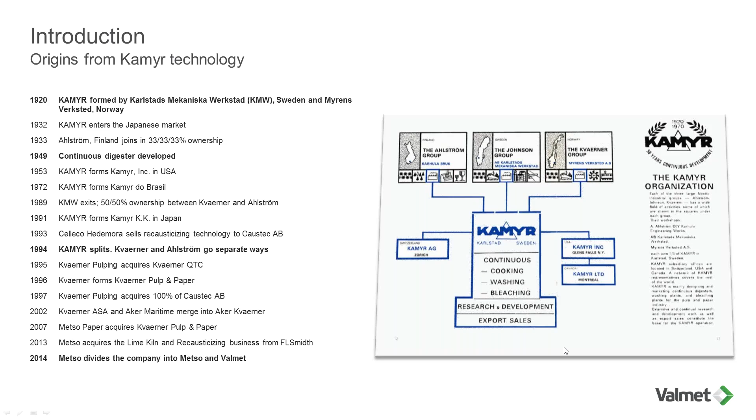So Valmet has been present in the continuous digester technology since the beginning, with many startups around the world. The development continues today through the Valmet continuous cooking technologies that we offer with the new digester systems. And over the years, Valmet has worked to apply these newer technologies offered with the new systems back to the older conventional systems that most of us here in North America are familiar with.

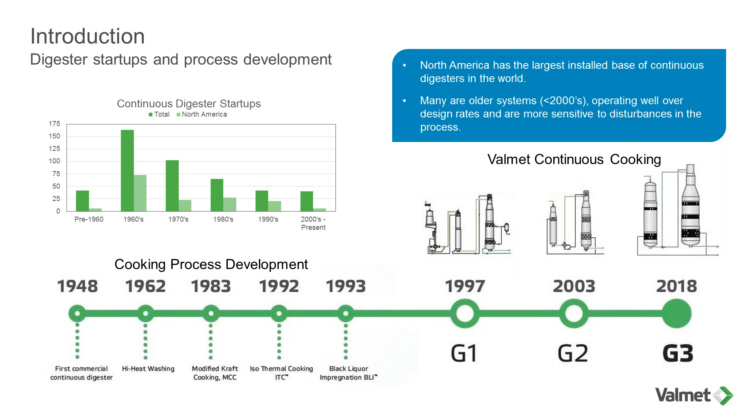North America has the largest installed base of continuous digesters in the world. And many of these are older systems that have been running for many years, operating well over the design rates. And as a result, they're more sensitive to disturbances in the process. So for those that have worked with a continuous digester system, we all know that there are many common issues found with overloaded systems. And what you see on the screen here are just a few.

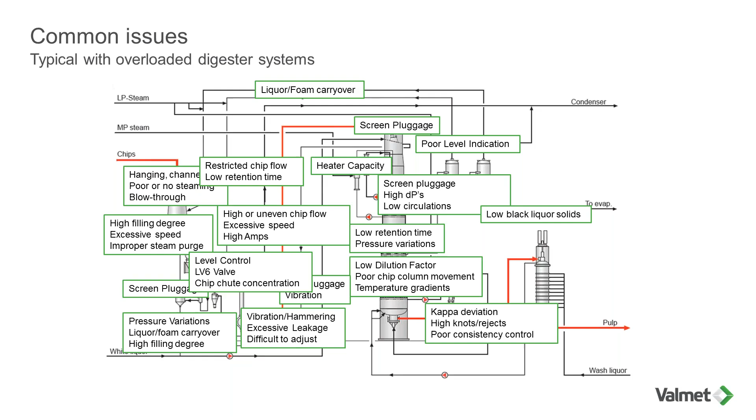We see issues from the chip bin through the feed system, the digester vessel, flash system, basically across the entire digester system. And since each system is different, they have many unique issues that require a thorough investigation. So from these common issues, we also get common questions from our customers. The first being, we have a problem with blank. What does Valmet have to help with that issue? And also, the customers want to run more production. What is the maximum production that we can achieve from the digester, and what is needed to get there?

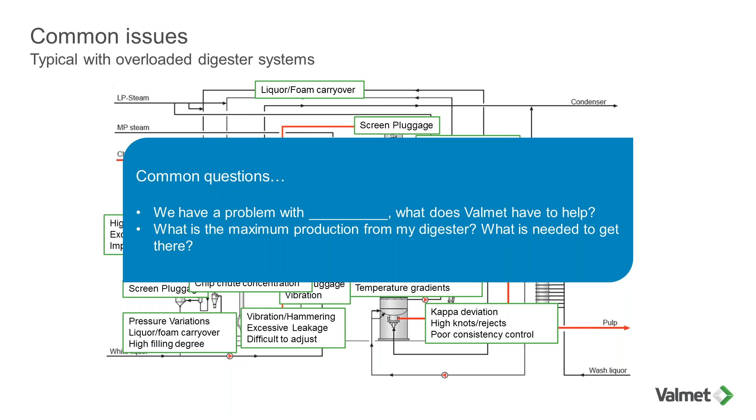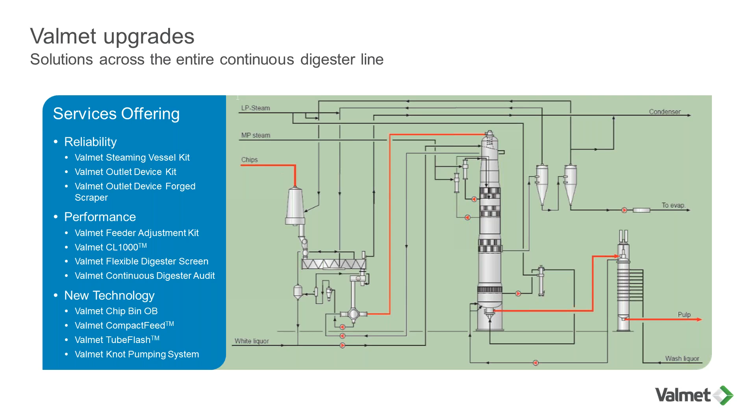So when you look at what Valmet can offer, we have solutions across the entire continuous digester line, from the chip bin all the way through the vessel to the blow line. These upgrades can improve reliability and runnability, and several are shown here on the screen. So with years of experience in the continuous digester, Valmet can offer that OEM product knowledge along with new technologies for the system. And today, we're going to be reviewing the Valmet continuous digester audit. That's the approach Valmet likes to take in reviewing an overloaded digester system.

So the Valmet Continuous Digester Audit is a process audit that's tailored to meet the needs of the mill. So we focus on whatever that specific need is, whether it's a planned production increase, quality improvements, or just the overall reliability and availability improvement of the system. And the intent of the audit is to address the system issues, not just the individual components, but since all of those issues are often interrelated, it's a holistic approach to evaluate the entire system. We begin by looking at the existing equipment, at the current conditions, and see how those compare to design.

This allows us to identify causes of the system disturbances or bottlenecks in the process. And on the next few slides, I'll show examples of some key design calculations and evaluations that we use, as well as some considerations around the digester vessel design. Following that evaluation, we're able to provide recommendations to improve the current conditions and system performance, as well as any considerations for future operation with increased production or things like that.

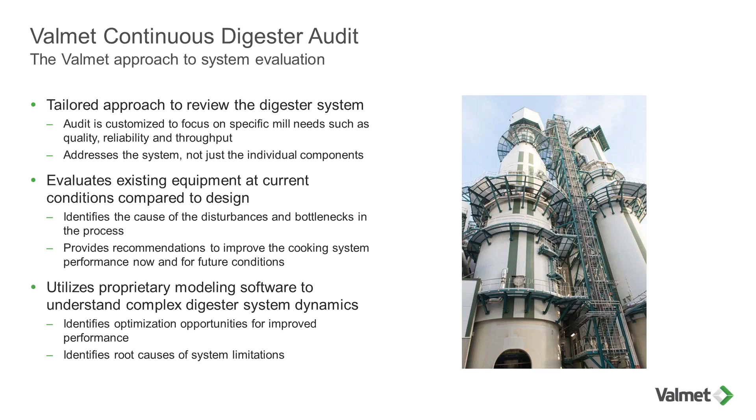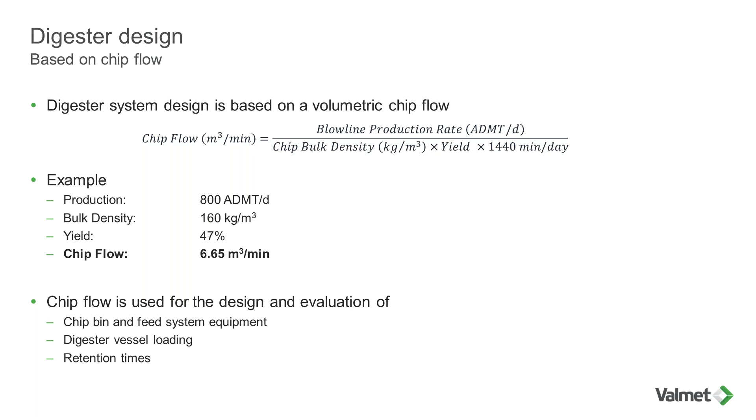One of the first things that we look at when it comes to digester design, one of the fundamentals, is the chip flow. Chip flow is calculated based on the target production, the chip bulk density, and the overall digester yield. The chip bulk density and the yield are often the more difficult parameters to understand, but they are definitely key pieces of information in order to arrive at the correct chip flow. And these are typically established from laboratory tests or cooking trials in the case of a new digester system, or often the mill have performed those tests on their own, and so they have that data.

Chip flow itself is really the single most important parameter when we evaluate the digester system. We use it to evaluate the sizing of the feed system equipment. An example would be for a low pressure feeder for a given chip flow and a given size of feeder. Does it have the proper capacity? Is it operating at the correct filling degree? If not, can the speed be increased to get to the appropriate filling degree, or do we need to get a larger size feeder? That's the type of evaluation that we do for all of the digester equipment from the feed line through the digester. And then also we use that chip flow to evaluate the loading of the digester vessel and the retention times, and we'll get more into that in the next few slides.

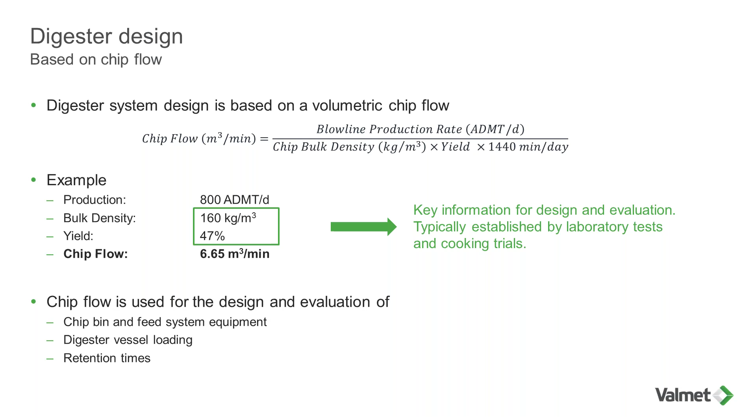When we look at the maximum production from the digester, we often discuss the digester specific load, or the chip load from the digester. What specific load is by definition is the chip flow divided by the cross-sectional area of the digester vessel taken at the extraction screens. Through experience over time, we've seen that digester operations can be compromised whenever that chip load is well above design. So most digesters were built for around 15 cubic meters per square meter hour of chip load. I know that's a strange unit, but basically it derives a velocity of the chip column through the vessel.

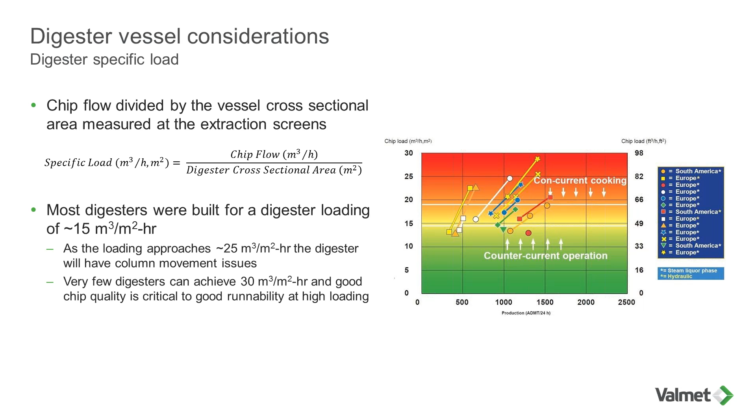So in the graph, you can see typically at design, the digesters were at the 15 specific load, and they operated with a countercurrent upflow in the digester. But as that loading increases, what the mills are forced to do is transition to a concurrent type cooking process or a downflow cooking process because of the excessive loading in the vessel. It's also important to know that this is one of the most difficult ones to overcome for folks that are looking to increase production. When the chip load is high, there aren't really any avenues to address the high chip load because there is simply a constraint of the overall digester vessel size.

And as the chip column is formed, as the cooking is happening through the digester vessel, that packing degree will increase as the chip moves through the digester. So at the bottom of the digester, a typical packing degree will be in the 1.7 to 1.9 range. And again, what that's telling you is you're able to increase the amount of chips in a given volume. So there's less void space around the chips in the bottom of the digester.

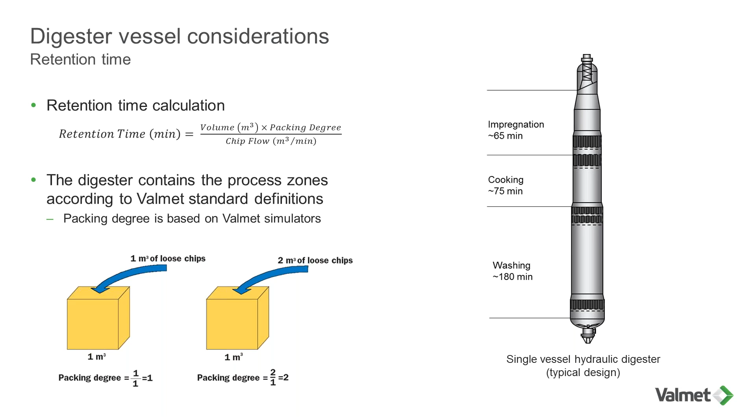And what we do through the audit is really look at what those retention times are and provide some recommendations of what can be done, whether it be modifications to the digester vessel to change the process zones, extending the impregnation zone, cooking zone. Those are typical retrofits that can be done for the digester. So a good understanding of what the retention time is, is key to that evaluation.

The third thing that we look at when it comes to the digester vessel and capacity involves the loading of the screens in the digester. In almost all cases, the flow resistance is in the chip column itself and not in the screen. So for a hydraulic digester that has cooking circulations or for an extraction zone in the digester, you're trying to pull the liquor through the chip column and through the screens to exit from the vessel. So in nearly any case, that resistance is in the chip column.

And so what that means is that you need adequate time for the liquor to pass from the center of the chip column through the chip bed to the digester wall. And that time really equates to overall screen zone height. A typical design based on, again, many years of experience with continuous digesters is around 15 air-dried metric tons a day per square meter of screen area.

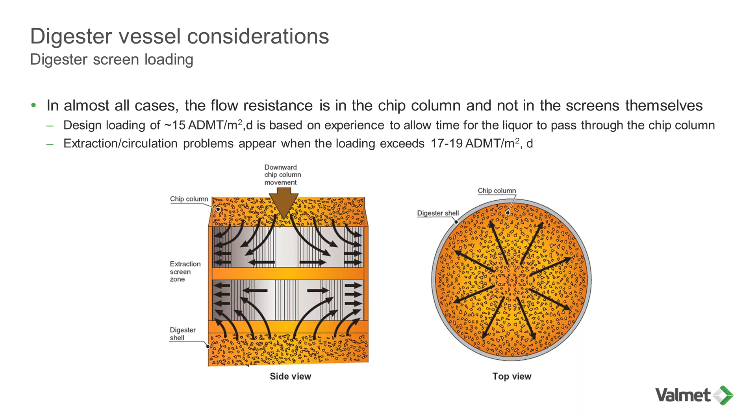And what we see is that as that loading increases in the 17 to 19 or even in the low 20 range, that's where folks start seeing issues with limited extraction, plugged screens, and circulation issues. So reducing the screen loading is something that can often be done with additional screen height. And that's something that we review in the audit to see what the best approach is in order to achieve a reduced loading.

The next thing that we look at in the audit, we use the Valmet simulators to really review the digester operation itself. So we have two simulators to do this, and one is Valmet Packsim, and that's used to evaluate the chip column compaction and the overall driving force, the forces that are moving the chip column through the digester.

And what Packsim does is it's a model that divides the digester from top to bottom in several cross-sectional segments. And so a balance is done across those segments in order to develop that evaluation, the total picture of the digester. So we simulate the runnability of the digester by modeling that interaction with the liquor flows, temperature, chemical concentrations, and kappa.

Crossim is the second simulator that we use, and it's a little bit different. So here we're looking at the process conditions, but in this case, not only are we looking at it from top to bottom, but we're looking at it radially across the digester, from the center to the digester wall. So here we use Crossim to help evaluate the homogeneity of the cook.

So we divide the digester again from top to bottom into several segments, and then each of those segments is divided into 10 concentric rings, and a balance is done between the rings and between the segments. So we're trying to evaluate similar parameters here, but again, not only in the vertical direction between the segments, but also across the chip column itself for each of those rings. So we use those simulators to really get a better understanding of how the digester is performing.

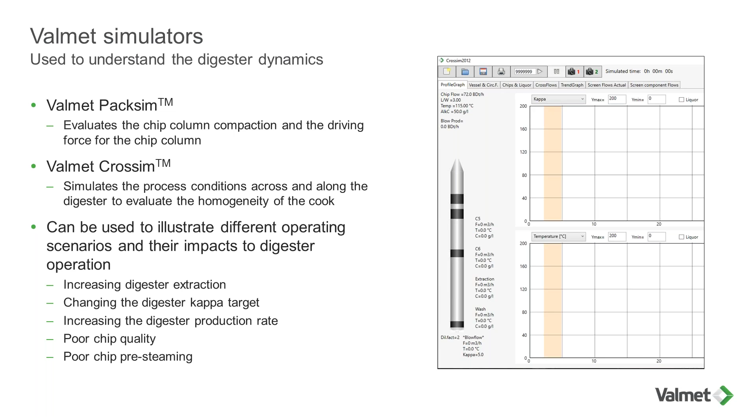And then also, once we match the simulator with the current operation, we then know that we have a good model that we can illustrate different operating scenarios and what the impacts are. So whether it be increase in extraction, increase in the production rate, change in kappa targets, so on and so forth, there are many different parameters that we can model and better understand what the impacts are.

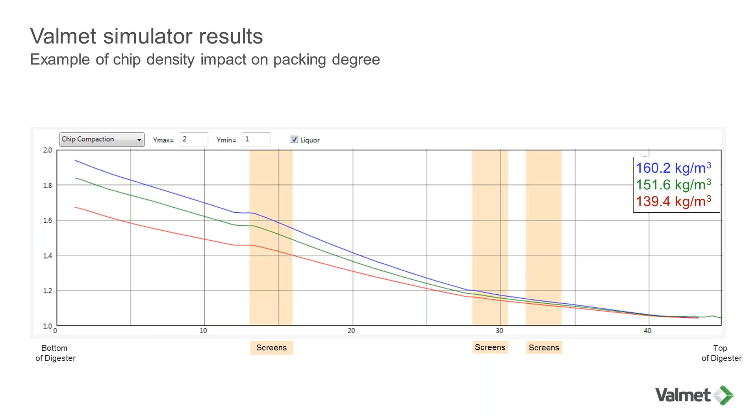So if you're above that or below that, that can really impact the runnability of the digester, whether it be too high of compaction prevents liquor from penetrating the chip column, so you end up with runnability issues of not being able to move the column. That's why often the dilution factor is reduced at the higher production rates. And then too low of a packing degree can have its impacts throughout the digester on screen pluggage and circulation issues. So this is a pretty simple example of really illustrating what the changes are with a change in bulk density.

So for CrossSim, here's another example, and you can see the graphical results are very similar, but you see multiple lines in this case, and what we see are 2 different examples here. The blue lines being a high specific circulation in the cook zone, and then the red being a lower specific circulation in that same cooking zone. And you'll see that there are 10 lines for each of those, 10 red lines, 10 blue lines, and those are those 10 concentric rings that we're talking about for each segment. So you can see from the upper circulation on, the gradient starts to form across the chip column in both of these scenarios.

But what I really want to highlight is the impact on the final kappa at the end of the digester. And what you can see, the red lines at a lower circulation have a significant kappa gradient across the digester. The higher circulation has a considerably smaller gradient across the digester. This shouldn't be surprising. I think we all understand the impact of having an adequate circulation flow in the cooking zones to help maintain a good even temperature across the chip column so that you get good even cooking and an even kappa coming out of the digester.

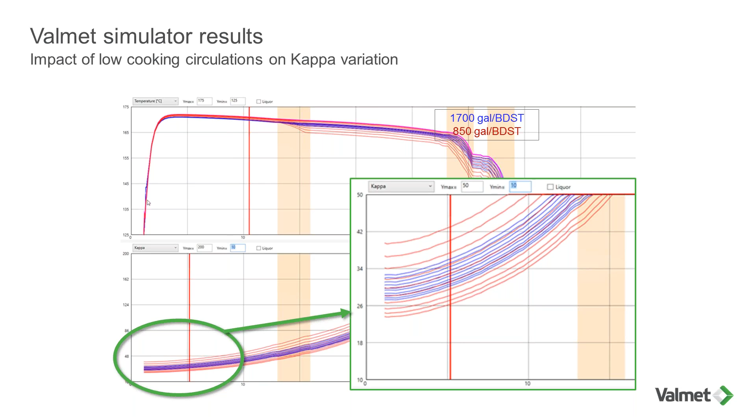So this is really a simple example, but where this gets more interesting and more powerful to the user is when multiple changes are made at the same time and really trying to understand and quantify what the change will actually be. That's where the simulator really shines, being able to perform this type of evaluation, as well as the other evaluations on the alkali profile and temperature profile in the digester. And you can do all those simultaneously. And to the average person, it can be very difficult to understand what the true result will be, but it's easy for the simulator.

What I just reviewed is really some key items to evaluate the digester system. In the audit, we review what we discussed today along with many others in order to really get a full picture of the overall system performance and identify the root causes of what the limitations are in the system. Another benefit of the digester audit is it provides that plan, basically the roadmap of short-term and longer-term process improvements. In many cases, the alternatives for these improvements are suggested in the report, and those help with the investment decisions and the justification for those capital expenditures. We provide a written report that's very detailed and written very objectively.

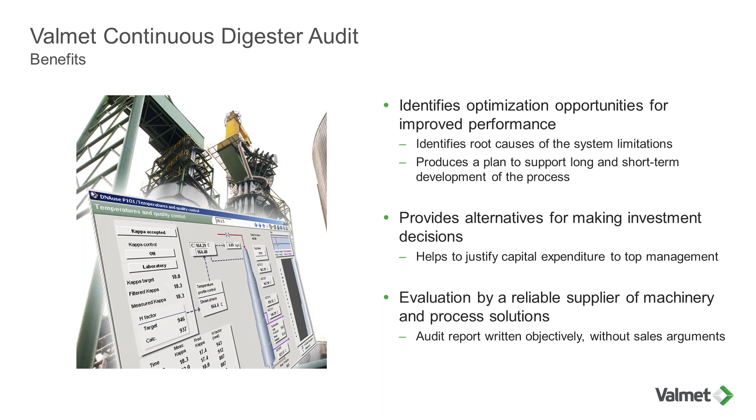It doesn't contain sales arguments, and the reason for that is so the mill can take that report and present it internally to be used to present the case for why the issues are happening and what some recommended solutions are. And those solutions are coming from Valmet, a group that's been involved in continuous digesters from the beginning, with many years of experience on digesters from around the world.

In these digester audits, there are a few common themes that come, and one that we see is that many mills have trouble with the high and low pressure feeder adjustment. Inherent to the feeder design is that both of these have a tapered rotor and a tapered housing that allows the rotor to be adjusted to maintain the clearance between the rotor and the housing. Valmet recommends that we do that adjustment twice a week, somewhere between an eighth to a quarter turn of the hand wheel, and make that adjustment so you're maintaining a good constant motor load on the feeder.

But what we see is that many mills have trouble with this, or they don't adjust it, particularly in the low pressure feeder case. And there are many issues that result from that. Irregular stops, trips, things like that from the feeder. Excessive wear by improper adjustment. If you're not making routine adjustment, then you do a significant amount at one time, that can cause you operational issues. Additionally, the lack of adjustment can lead to those issues as well.

So lack of routine adjustment, that feeder is going to wear in a certain spot and then make it difficult to move the rotor in past that sweet spot, if you will, from where it likes to run. And then ultimately, for a high pressure feeder, you're adjusting that feeder to control the leakage. And then similarly, for a low pressure feeder, controlling that leakage of steam through the low pressure feeder can make a big impact in filling of the chip meter itself.

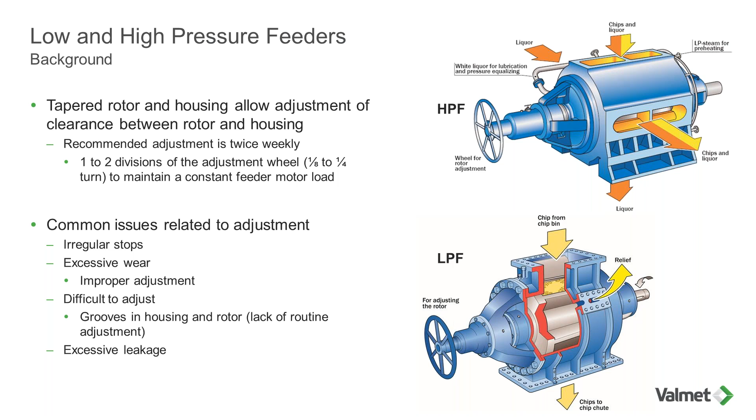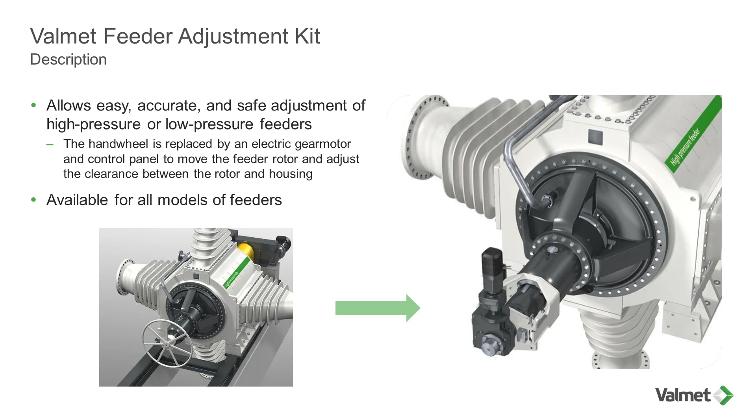So to help with the adjustment issues, Valmet developed the feeder adjustment kit. This is an easy way, a safe way to adjust a low pressure or a high pressure feeder. So what we're doing is we're replacing the hand wheel with an electric gear motor that's mounted to the feeder so that you can adjust the rotor position with the touch of a button. We have the feeder adjustment kit that's available for any model of feeder, whether it's a high or a low, and it really makes a difference on the overall ease of operation for the feeder.

So a few of the benefits here I'll go through. Number one, it's very easy to install. We have kits that are available for any feeder size. In most cases of a high pressure feeder, at least, all the parts are reused except the hand wheel. The locking pin goes away. This kit can be installed on site if the mill chooses, as long as the pre-work is finished ahead of time. That's the electrical portion of the project.

The mechanical portion, actually installing the kit on the feeder, can be done in a routine 12-hour outage. Or if the mill prefers, we can do the installation back at one of our service centers. So as part of the feeder rebuild, we can offer this kit as a bundle and allow for some savings for installing that feeder adjustment kit on the feeder while at the workshop.

The main reason of having a feeder adjustment kit is really to help the operators, to make it easy to adjust and make it an accurate process to adjust. Mounted near the feeder is an electrical enclosure. That enclosure will have the PLC, electrical contactors and also this HMI touchscreen display. And so that allows you to control that rotor position with the touch of a button.

Also mounted on the gear motor is an encoder, so that tracks the rotor position. That can be fed back to the DCS, to the data historian, so that you can keep track of the rotor position over time, and that can help keep it on top of the operation as well as planning for the next change of the feeder.

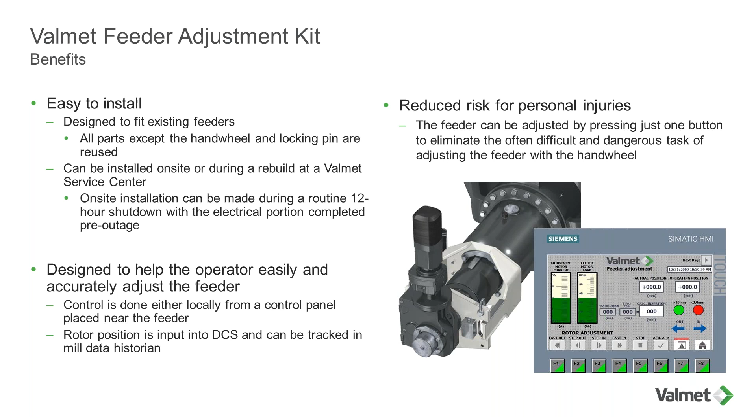Another benefit around the feeder adjustment kit is the reduced risk for injury. Because we're pushing a button and letting the gear motor do all the work, moving the feeder in and out, that eliminates the hand wheel. It eliminates the valve wrench or the cheater pipe or the chain hoist that we've seen used to move the feeder rotor in and out. And so if we can eliminate those safety issues, potential back strains, replace that with a push of a button, it makes life easier for the operators at the mill.

Additionally, the way the kit is set up, it has a finer resolution than the existing locking pin arrangement on a high pressure feeder. So currently, in order to get the pin locked on a high pressure feeder, you're moving that rotor 0.2 millimeters. The feeder adjustment kit has a finer resolution of 0.1 millimeter that allows for an easier

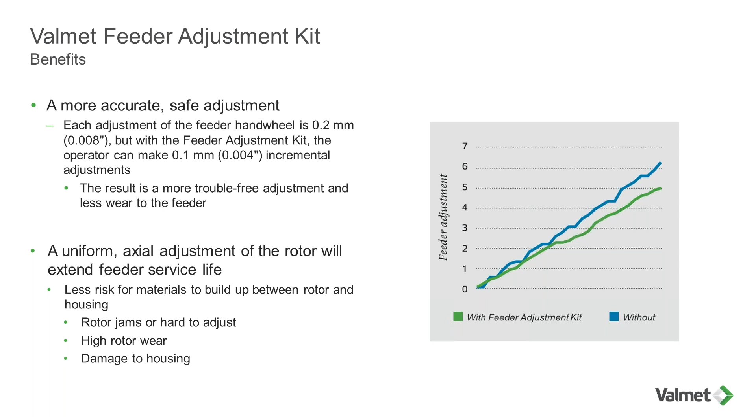adjustment. And ultimately, if you're making smaller adjustments to the feeder, it can lead to longer service life between rebuilds for the feeder because you're less likely to have any materials that build up between the rotor and the housing, or jams, rotor wears, things like that.

Another item that we often see through the digester audit is that mills have erratic and unreliable chip level indication. I think most of us understand what chip level indicators are. We're trying to measure the overall chip level in the vessel, whether it be the impregnation vessel or the digester. And chip level is important that we understand what the chip level is so that we can control it.

We need to control the chip level so that we have good retention time and good uniform conditions throughout the cooking process. So like we mentioned earlier, there are only so many minutes in the vessel for retention time, and if your chip level is varying, obviously that affects that and introduces variation into the process.

Most of the systems out there, whether it be a Valmet system or a competitor system, are using a similar concept in that there's the mechanical sensor that's mounted on the vessel. There are electronics that measure the signals from the sensor, and then a level is calculated from that.

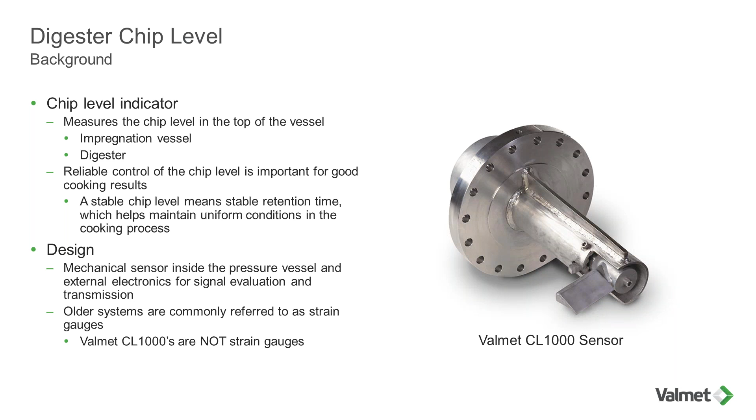Most often we hear people refer to these as strain gauges, and that's what many of these systems are, strain gauges. But a Valmet CL1000 is not a strain gauge, and I'm going to explain a little bit more about what that is in the next couple slides here. But first, let's talk about chip level.

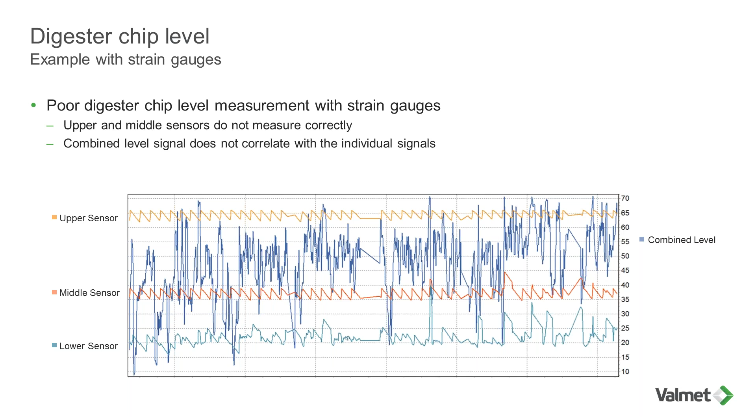When I mentioned that we see mills with erratic, unreliable chip level, here's a good example. So here was a 3-sensor system in a hydraulic digester. And you can see that the upper and middle sensors really have no correlation, don't seem to be measuring correctly at all with the overall combined level. The lower sensor has activity, but it's really difficult to correlate that lower sensor activity with the overall level in the digester. And this was an old system with strain gauges.

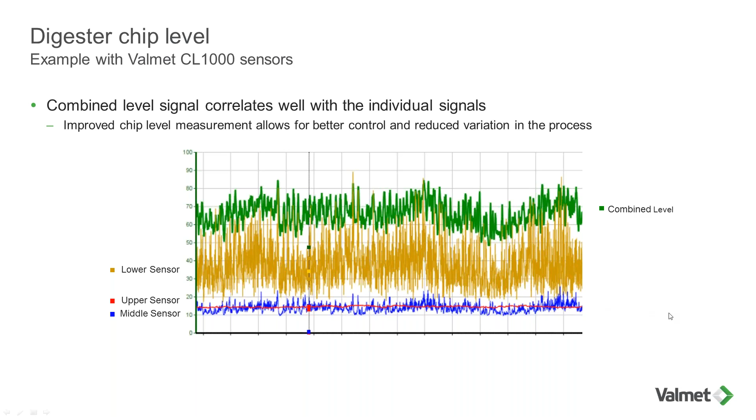And so how a CL1000 system works, typically you're going to have 3 to 5 sensors on the vessel. With a single vessel hydraulic or steam liquor phase digester, it'll be a 3-sensor system. A 5-sensor system is pretty common for a 2-vessel hydraulic digester. So those sensors are mounted on the digester. There's an electronics cabinet that's mounted either in the field or in the MCC in an enclosure.

And the principle is similar to the strain gauges in the fact that we're trying to measure the chip level by the weight of the chips above the paddle. So the chip column above the paddle is going to exert a force on the paddle. The paddle is going to move and the tube that it's attached to will twist. And here's where the difference comes in between the CL1000s and the strain gauges.

The reason strain gauges are called strain gauges is that they have a strain gauge mounted to the tube so that they're using a resistive type measurement to measure the strain on the tube as it twists. For a CL1000, we use a differential transformer. So we're measuring the twist of the tube, but it's indirectly. So we measure it indirectly by these differential transformers, and what those are is a set of coils with an air gap between them. As that air gap changes, it changes the voltage.

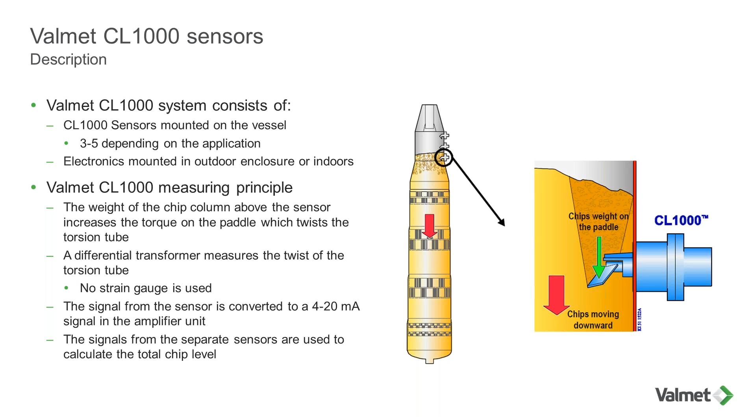That voltage is converted to a 4 to 20 milliamp signal, and then those signals are used in the overall chip level calculation. So the CL1000 system, there are 2 different systems depending on the application, whether it's a steam liquor phase or vapor phase digester or a hydraulic or impregnation vessel.

And it's also key that the sensors are installed in a good location on the vessel. The location of the nozzles and the sensors plays a big role in the performance of the overall indication. And that's something that we review on every project to look and see that the vertical and horizontal distance between the sensors is acceptable. In most cases, we can reuse the existing nozzles in their existing locations. The CL1000 uses a 10-inch mounting flange, which is very typical of even the older strain gauges that are out there. So it makes it a pretty simple installation to upgrade to.

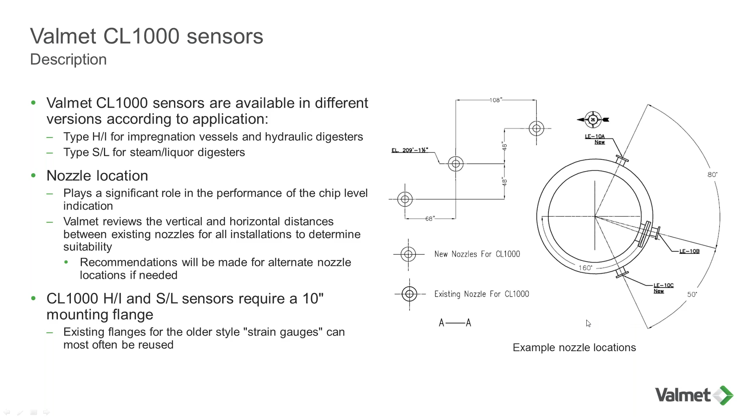Some of the benefits around the CL1000 is that we are measuring the chip level by mechanical forces, so we don't have to worry about foam or liquor impacting the level. These are completely seal welded. This is a big difference from the other sensors that are out there. Because they're completely seal welded, that means you don't have to grease the sensor, put the grease in there to act as that sealant between the liquor and outside. So that makes it a very maintenance-friendly sensor. There's very little to do on an annual basis.

Strong design, there are no shear pins. It's built to withstand the weight of the chip column. No concerns there with needing shear pins in the sensor. No seal water. Again, they're seal welded. Most of the older systems are now using grease instead of seal water anyway.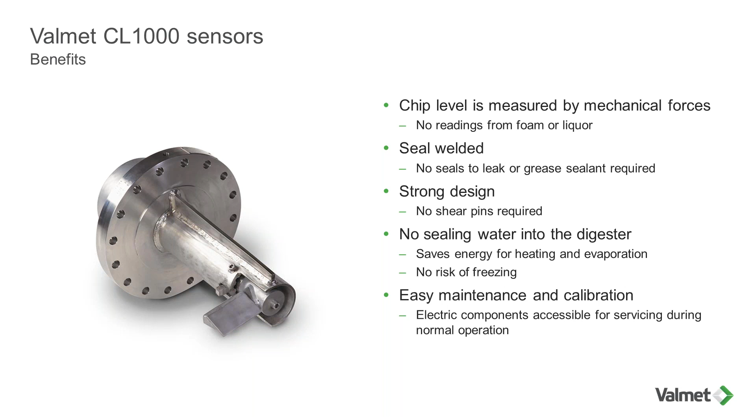But really the biggest benefit around the CL1000 sensors comes from the easy maintenance and calibration. All of the electronics, all of the components that can have issues are mounted externally. So that allows for any type of repair or calibration to be done on the run. So this means if you want to do a calibration on a sensor, you can do it on the run. You don't have to wait till a shutdown. You don't have to take the sensor offline until you have the opportunity to work on it or pull the sensor from the vessel. It's a very easy, user-friendly, quick process to do that calibration, and typically that's done on an annual basis. So the routine maintenance associated with the CL1000 system is very user-friendly.

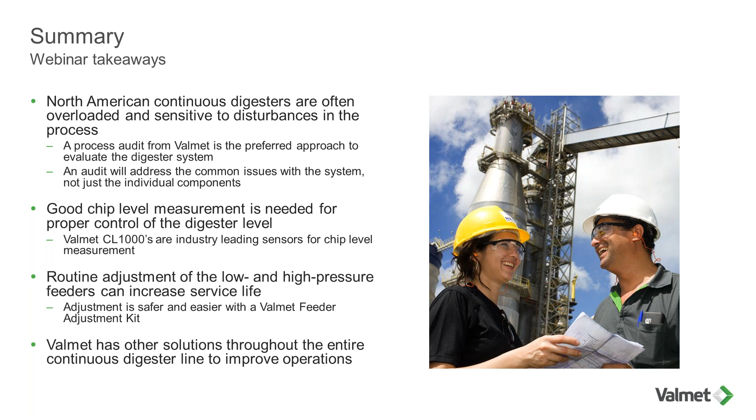Lastly, I just touched on a few things today, but as you saw at the beginning, Valmet can provide solutions across the entire digester line. And these are meant to make your life easier and improve the operations. And we would definitely welcome any questions that you have around those items.